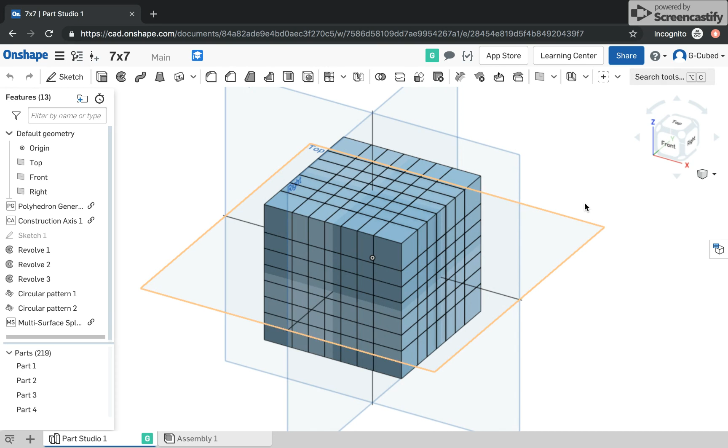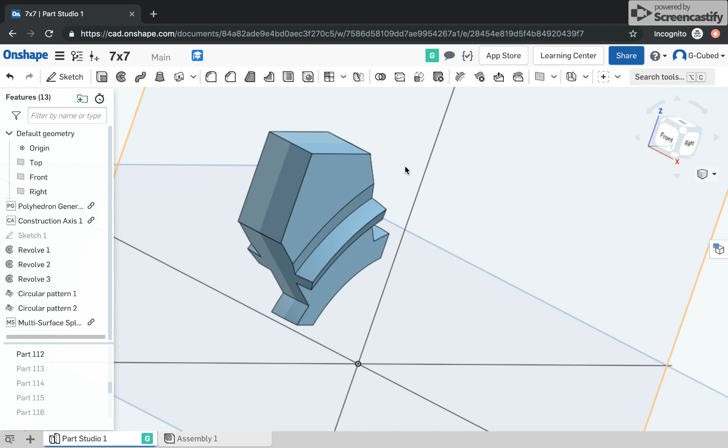Here's the 7x7. First we'll be looking at kind of the pieces just so I can show you. It is a fully functional 7x7. It might not be the exact same mechanism most of the mass-produced 7x7s use, but it is a functioning 7x7 mechanism. So I can show you a couple more parts here. Just select a few at random.

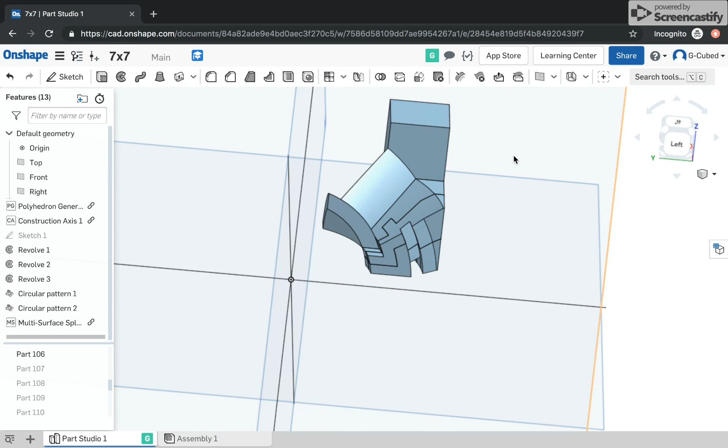So if you're not familiar with a 7x7, the outer layer on really anything bigger than 5x5 has to be slightly larger. If it's not, it won't really work, and this corner generally won't get a mechanism connected to it. So the outermost layer has to be thicker than the inner layers, which you can kind of see here how this layer is thicker than this layer. That's just part of how that works.

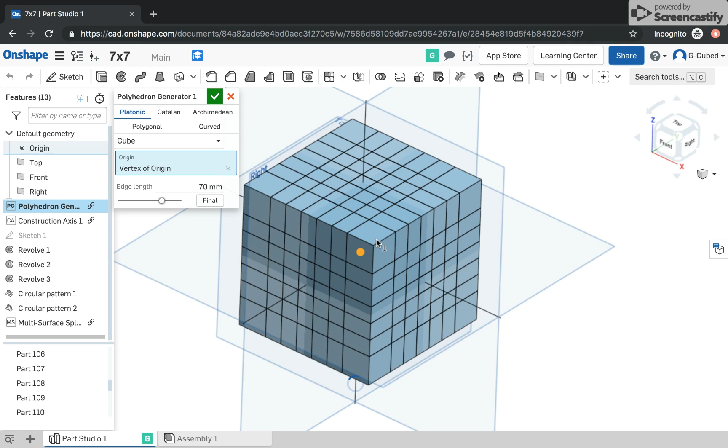So now I'll go through step by step what I did. This is kind of my first try, so I'm not 100% sure if I'm going to be able to recreate it, so I'm just going to go through the steps. But to do this, you do have to be fairly familiar with either OnShape or SolidWorks or whatever you're using to design, because it's moderately complicated, but not really. You just have to know how to draw a sketch and do revolves and such things like that. So it's really not that complicated because I'll show you the sketch.

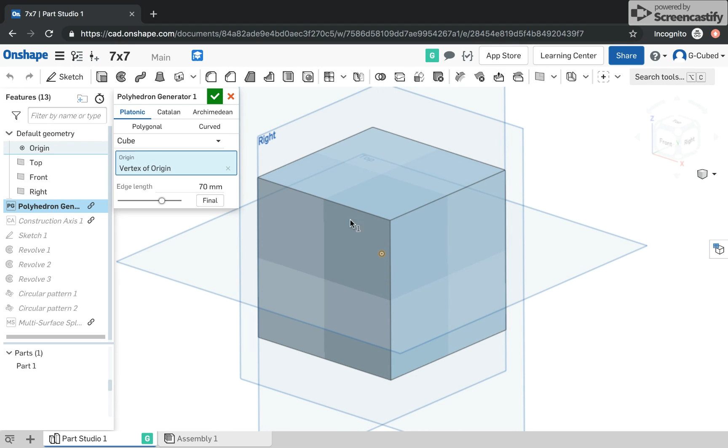But first, we're going to make a 70 millimeter cube based around the origin, like this. 70 millimeters is kind of roughly a general 7x7 size, so you can kind of do something like that. So we do that first. Yep, you just gotta draw the cube, and then the next thing we're gonna do. Sorry, this is being really slow because I'm in an incognito window.

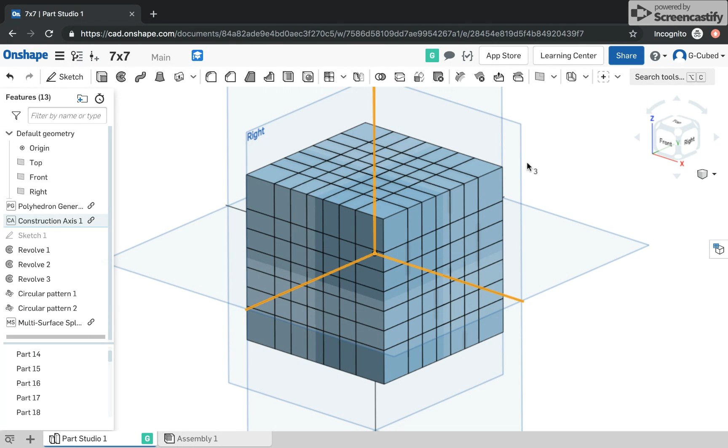Then the second step is you're gonna have to make a construction axis. If you don't know what that is, it's these little lines you can see here. I'll highlight. It's these lines. It basically just gives you something to revolve things around. So when you do this, you select origin. You just do the origin dot at the very center right there.

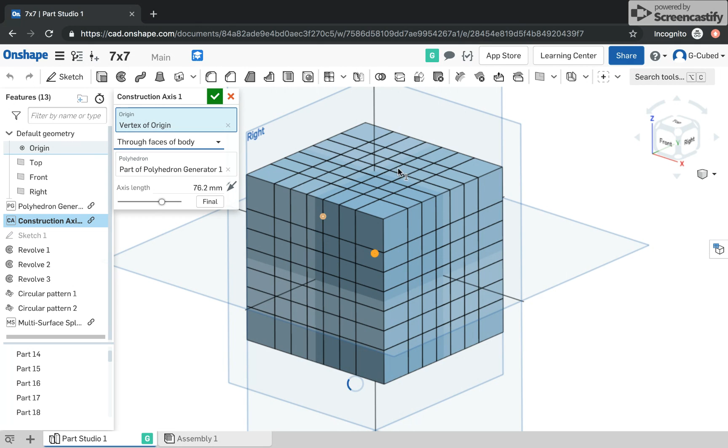And then I switched this. So there are a few different options. You switch it to faces of body. You do that because you want it to go through the center of the faces, so you can revolve it around the faces, not around the corners or around the edges. It has to be around the faces, and that's how you get the face turning. And then you just select the cube.

Yeah, it's slowing down pretty good. You select the cube polyhedron right here. Click on that, and then you can change this to whatever length you want. As long as it's long enough to come out of the cube, you're good. So then you do that. And this stuff is pretty simple and pretty obvious.

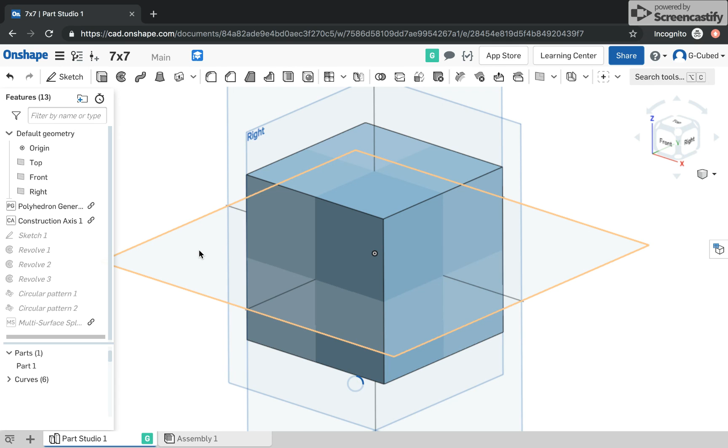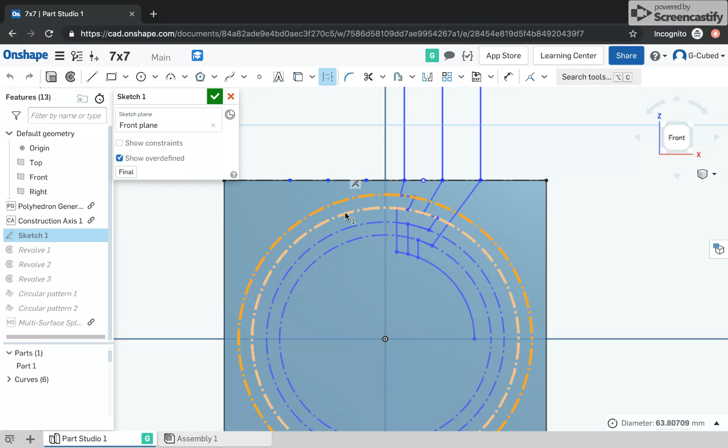But now, let's see, the next thing we're going to look at is the sketch. This is the main part of the whole idea here, this sketch here. And this is where certain complications come in. So don't worry about these circles here. I just have them to kind of help me hold everything in place. So I'm actually just going to delete those because it kind of makes everything a lot more confusing. But here's the 7x7 sketch.

You can see I've drawn out 7 lines up here, and what I did is I selected these 5 inside ones, and I clicked E to make them equal, and then I did these 2 outside ones to make them equal. And then, so now I can scroll these around, and it keeps the middle layer ones equal and the outer layer ones equal, which is what you want.

And then you can take a look at the sketch. I can do my best to describe it, but really, if you're going to try to make a 7x7, this is all you need if you're a good enough designer with twisty puzzles. You just need to know this sketch and how that works. So this is the sketch I used.

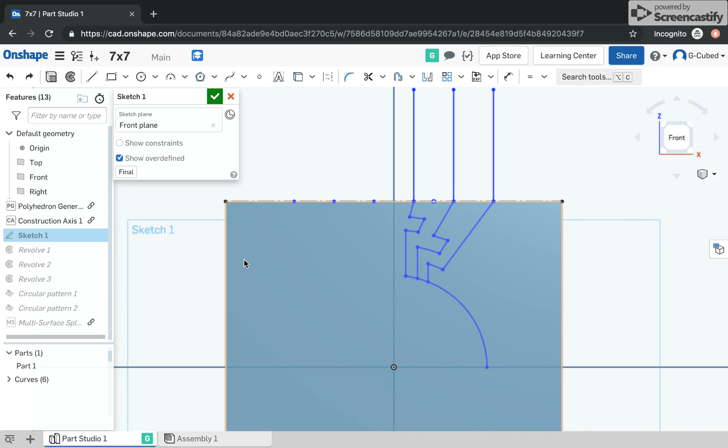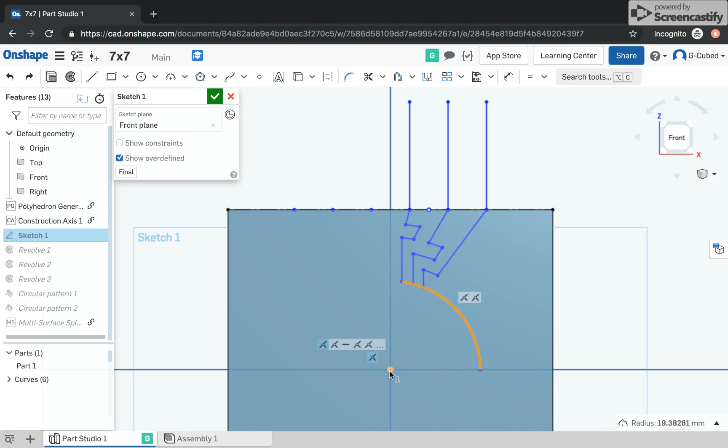You can see up here we have this center, so you can imagine that being the center with a little hook grip mechanism piece coming out right here, and then it goes back down, and then this center point circle I have here, which is based around the origin, is what makes the core, and everything just comes down and gets connected to that. So this is the whole center piece right here, and then it just goes straight down after that.

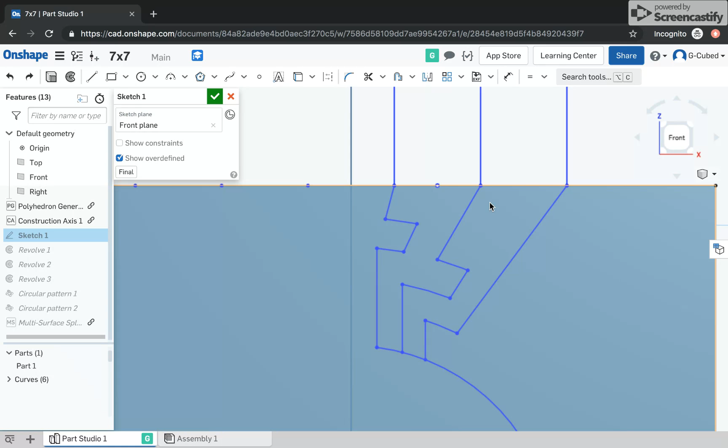Then you have the second layer of pieces coming out around the center, and so you have this hook in here, and then below this hook on this same line right here, from the circles I had before that I deleted, you have another hook coming out to connect to that third layer of pieces, essentially. The center is the center, and then first layer, second layer. So this is our second layer of pieces, and it has this little hook coming out of it.

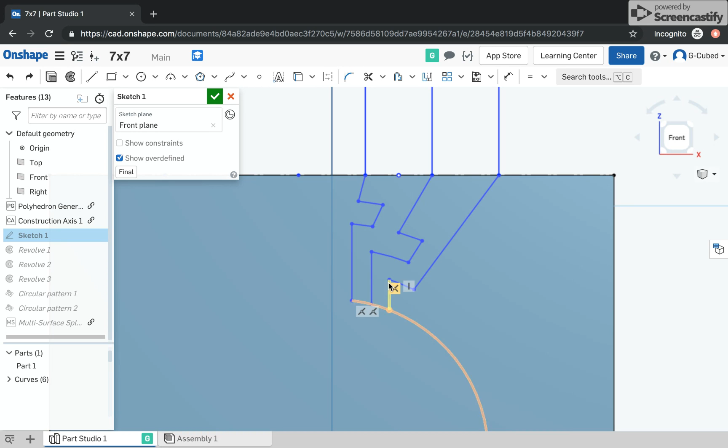And then at the bottom here, it goes in and up, and that is because that is how that last layer, which is the outer layer edges and the big corners, get their mechanism, and that's how they're held in, right there. This little indent is what they're grabbing into. And then everything comes down to this circle here. So it all revolves around the same core, which is very important. You can see a lot of these lines are pretty sloped, and that's just how that works.

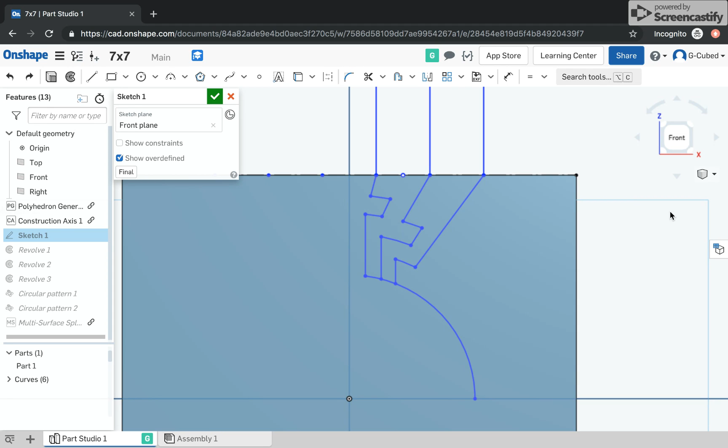So I'll leave this up for a second if you want to pause the video and learn the mechanism, and then you can go off and design your own. I learned the 5x5 mechanism from a different video, and this is what I did. I just stopped the video and looked at the sketch for a little while and learned it, and then I figured out how to make a 7x7. It's pretty simple. After you learn how to make a 5x5, you can do just about anything once you get the idea. So this is a 7x7. So that's it for the sketch.

It's going to be a minute to load, but I'll go off to my next thing here. Next thing is I did 3 revolves, because since it's 7x7, there's 3 different layers on each side around the center. So imagine 1, 2, 3 layers, a center, 1, 2, 3 layers. That's 3, 3, and 1, which makes all the 7 layers. And so that's why it takes 3 revolves. I did them all separately. I think you might be able to do them in 1 revolve, but it works better if you don't.

And then I just patterned them around 4 times, each one around this axis and this axis, and then I just split the whole thing. And that is about it for this video.